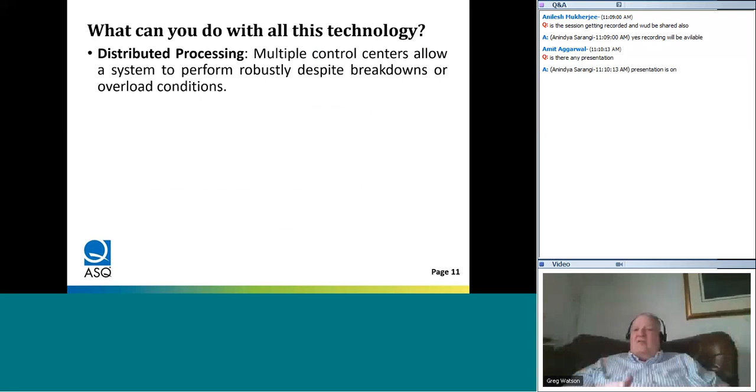And as we start looking at it, well, we can have distributed processing. So we can have multiple control centers that allow us to operate robustly despite breakdowns or overloads. Typically, what would happen in many factories is a single system where we have central processing. But now things can be done in a distributed way.

We also see we can have automated detection, where we have sensors remotely capturing minute changes in the system, and we can now start seeing, okay, let's react in a more real-time environment to what's happening in the system. We can have remote diagnostics.

One of the companies here in Finland that's not very far from here is Kone. They make elevators. And for about 15 years, they have had systems monitoring elevator performance through the internet. And they can actually make remote changes to fine-tune the way those elevators operate as they see changes in the systems that tell them something needs to be done, or even get a cue that says, come and send a service operator. It's more than we can handle by computer.

Adaptive learning. As we start looking at this data over time, we can learn from the patterns of change that we see. And we can use this as one way to understand what needs to be done, or is there a problem coming? So also close by is a refining company, Neste Fuels, and they make renewable fuel. So they'll make fuel out of fish fat and animal fat and all the bad things that we tend to throw away, and they turn that into fuel now.

And so they can actually learn from the patterns of the way the refinery operates. Is it getting time where we need to change catalyst, or we have to change the temperature, or recycle the materials in the converter systems?

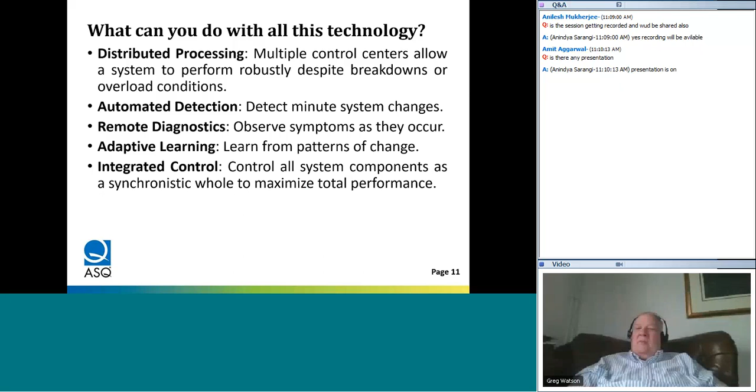And then we can also have predictive analytics. And this is where we reduce future risk or improve the real-time control of the system, because we can predict exactly what's going to happen with some degree of probability. And this is exactly what Deming was talking about when he talked about profound knowledge, that we predict the future with some degree of probability.

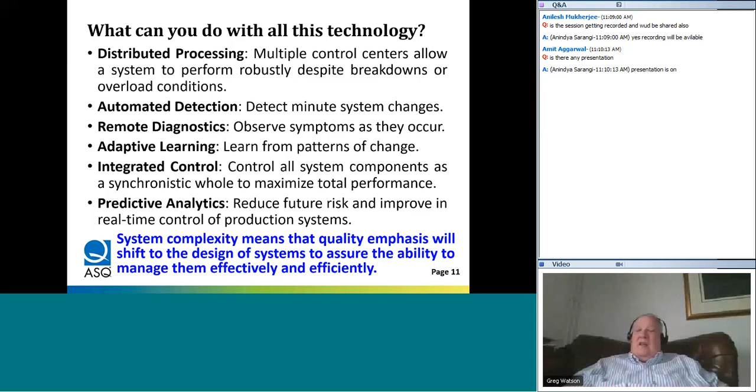So system complexity, though, means that the quality emphasis will shift away from managing the system to the design of the system. In other words, we will have to anticipate all of those things that can go wrong to assure that the system can manage itself efficiently and effectively. And so that means there's going to be a shift in what we do, because we have to get to the front end of this. If you're going to put that system in place and let it run, that means that we have to make sure the system understands what it should do in all the different circumstances.

So we also see there's an aging of the traditional quality technologies. It's not just me getting older. The stuff we do is getting older. And so we start seeing there's been an analog to digital techno shift. And so many of the quality tools we have were created in what I think of as the analog age. And they do the manual manipulations and hand calculations.

If you think about it, people like Kaoru Ishikawa, who we venerate in the quality community, he never used a personal computer. And so we think about the tools that they made. They were made to be operated with pencil and paper. They're very good in terms of human activities and things we want to do in a manual mode, but they're not necessarily good for the digital age. And so we start seeing these methods don't comprehend the abilities to capture and analyze data via computer systems.

In just one example, in an ASQ article I wrote about a year ago, it was about fishbone diagrams. And fishbone diagrams were a good way to decompose a problem in a manual system.

But today we can use something like mind maps, and we can start taking a look and more aggressively understand what's happening. And even on some of those mind mapping software, we can connect it to the data and let the data operate. And we can take that another step further if we start looking at automating how you do those connectivities within the systems. And those will be techniques that we will transition to as we get into this design age.

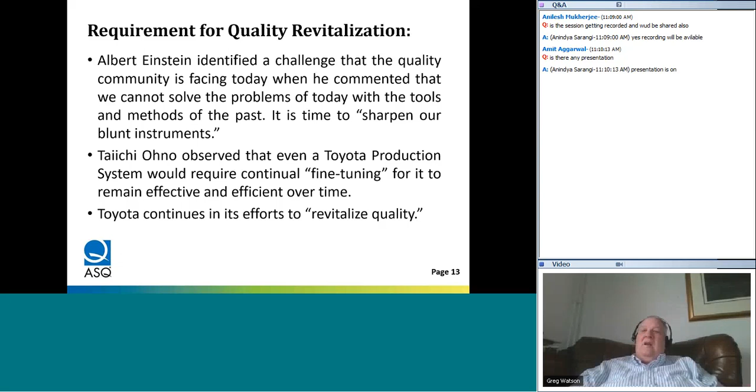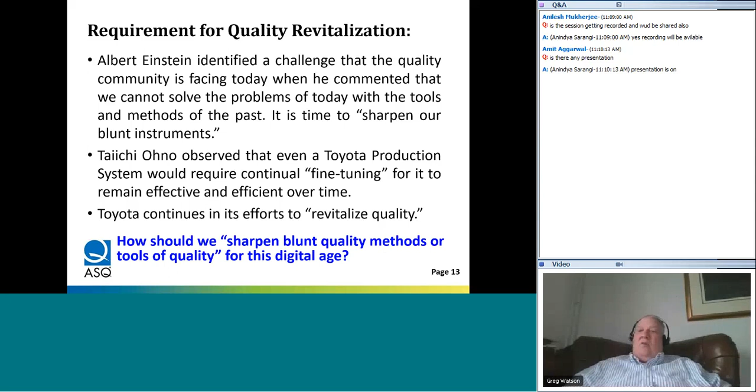And so how should we sharpen our blunt quality methods or tools of quality for the digital age? If we don't do it as people who care about quality, who's going to do it? And so this is going to be our challenge. How do we redefine quality for that digital age?

Well, first, this problem is deeper and more comprehensive than mere fine-tuning or reimagination can perform. We start seeing that this technology shift is similar to a shift from an internal combustion engine to an electric motor. You just don't plug and play and say, okay, copy, cut, and paste, move motor out, put motor in. We have whole system changes. And as a result of having that motor, we ask, how do we charge this?

Do we charge it off of braking systems where we can start finding some friction and use that as a way of adding power back into the system as we dissipate it out to run that electric motor? So we have to think about the whole system, how we'll re-engineer everything.

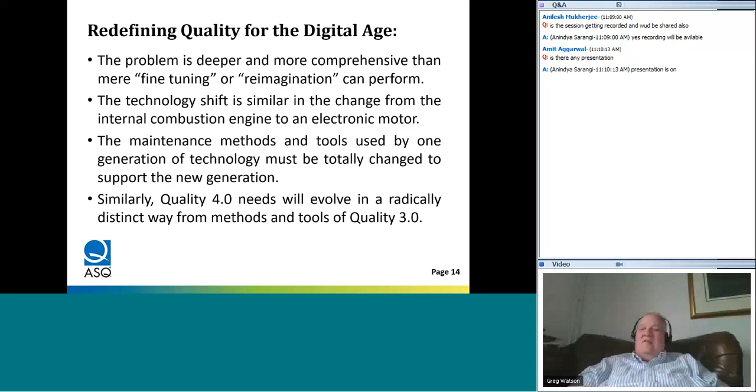And so the maintenance methods and tools used by one generation of technology must be totally changed to support the new generation. And so similarly, Quality 4.0 needs to evolve in a radically distinct way from the methods and tools of Quality 3.0. And so Quality 4.0 will have this total rethinking.

How does a quality system operate? What are the methods and tools of quality needed to support it? And what's your role? Will there even be an ISO 9000? Maybe we have to radically reinvent everything we're doing in terms of quality to meet this stage where the operator is no longer the source of variation, it's the designer of the system.

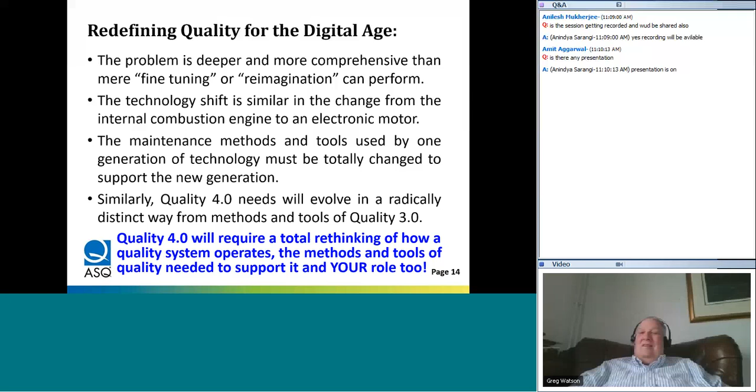So that brings us this question then, the second question. How do we learn to do smarter data inquiry? And this is the challenge.

I've grown up, fortunately for myself, I guess, in a digital age. When I was in high school, we had our first computer. It was an IBM 360. So I was 16 years old and I learned how to program BASIC. I'm 72 now, and I forgot how to program BASIC. But everything now is so much more simple because we've got higher order languages and all these other things happening.

So how do we get this smarter data? Well, Deming talked in a 1975 article in the American Statistician about the two types of data. He said there's enumerative data and analytic data. And when we look at this, he treated them as mutually exclusive. And he says that enumerative data is a collection of everything. That's when you're looking at the total distribution. There's no time component in that data.

And what you get out of that enumerative data is an analysis of risk. It's basically what you see on a process capability diagram. You see everything, and then you see the upper and the lower customer expectations. And then the other type of data is analytic. And analytic data is where we see the time history happening. And in that time history, what we're seeing is like in a control chart. And we start seeing how everything is moving over time.

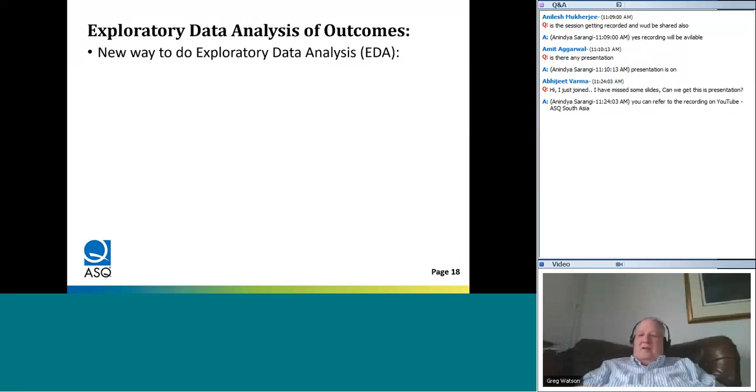I want to understand what are the physical and logical relationships in this historical stream of data. I can use six tools in sequence to build that learning.

The first is the individuals chart. This gives me the understanding of the sequence of patterns we see in the historical stream of data, and whether those patterns tell us something. Is there a trend? Is there an oscillation? Is there clustering in the data? Is there excessive variation? All of those are things that can be detected out of that system. Yes, computers can do that, but so can the human eyeball. We do that with an I chart, an individuals chart.

Now, one of the problems we have is all of the rules we have for those I charts are wrong. We can easily turn them on in the computer system, but they're wrong. Why? Because some data is maximizing data, like productivity—we want more, so the best performance is skewed towards the top of the scale. Some is minimizing, like defects or safety incidents, which means it will be skewed towards the bottom of the scale. So if the detection rules are based on normality, they won't give us the right set of rules, and we can get confused. We have to change that.

Another thing we can do is take a look at that same data in a different perspective, in probability space. We can view it as a cumulative distribution or probability plot, showing the likelihood of occurrence of each magnitude in the data distribution. On a probability plot, if I see a vertical line, it says all the data is at that probability level. As it starts going off, it says a new function is happening—something different than before. The number of distinct curves I can observe visually on a probability plot indicates how many different functions are actually affecting the data stream I'm observing.

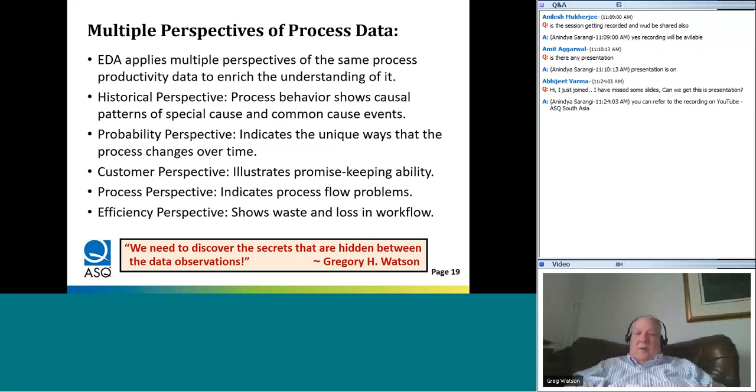So what we need to do is use this to discover the hidden secrets, and these secrets are hidden between the data observations. If we only do one-factor-at-a-time analysis, we won't be able to really understand all of those things. So we have to have an approach I call collaborative analytics.

Collaborative analytics has three distinct dimensions to it. First, it's people working together in a network system.

Just as I'm now coming into Calcutta or Delhi or Hyderabad, I'm coming into maybe Goa. I understand it's a little better place to go, the vacation place.

So we're now living in a world that's totally distributed, and we can have people all over the world working on the same problem. I remember years ago, I was writing a book in 1994, and I had the very first instance of a Price Waterhouse consulting group having 24 hours to write a proposal. They gave it to three of their work centers, separated by eight hours around the world, and they just passed the proposal electronically through and had it done in 24 hours. I said, hey, that's cool. And now we think, yeah, so what? So we start living in a world differently.

Second, networks can operate together. Our computers can talk to each other, and we can collaborate in this digital world as well. Third, we can have a group of networked experts working on data collection and processing to create what I call a hive mind—this is the hive, whether it's ants or bees, working together for a centralized purpose.

And now there's a group on the internet called digital doctors. What happens is, if you're living somewhere that doesn't have an expert, you can dial into digital doctors and have four or five experts help you on your diagnostics for a case. So the components of this approach are already factual states of existence, and soon they're going to merge together.

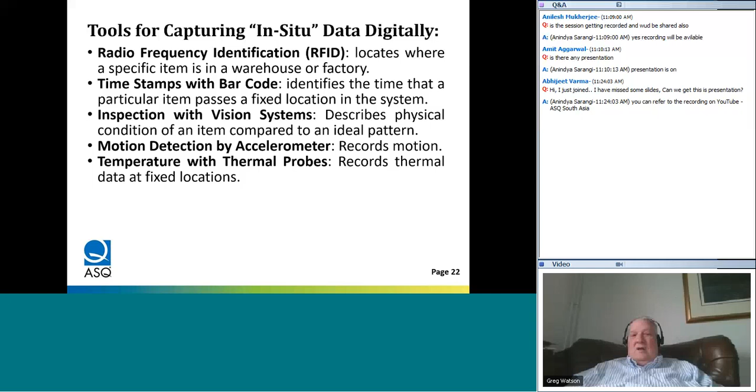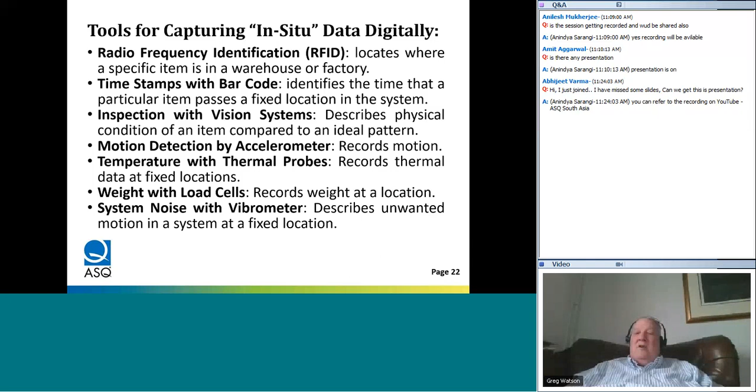We can have motion detection by accelerometer, recording how much motion is happening in a system. We can have temperature checks with thermal probes, saying here is the temperature at a particular fixed location in the process. We can have weight with load cells, recording weight at a particular location, or system noise with a vibrometer, saying there's unwanted vibrations in this system at a particular location.

So all of those are saying, what we have to find is where is the checkpoint for that particular measure we'd like to have in our system. Just as we have checkpoints in a manual system, we can also have checkpoints in digital systems. Remember, in a manual system, a checkpoint is where you use the measure to say how are we progressing — it's a monitoring process.

We can also have a control point, which is a checkpoint where you monitor, but you can also have a feedback loop to change the process. And when we have the feedback loop changing the process, that's when we have the automated control system. So just by analyzing our factories in a different way, looking for checkpoints and control points, and asking ourselves what is the sensor we would need to use to make that control happen.

And then buying the cheap ones from maybe Alibaba, we start finding out. I have one client with rubber factories all over the world, and he's trying to figure out a problem with vulcanization. It used to be you'd have very expensive platinum thermal probes. He bought a dozen digital sensors from Alibaba, about €1 each, threw them in the mix, and had them report. He got really good information. For less than 20 euros — I don't know what that is in rupees, but I'm sure you guys can do it in your head — it's not much money, but he got the same result as he would have gotten from a platinum thermal probe years gone by. So what can we do cheaply?

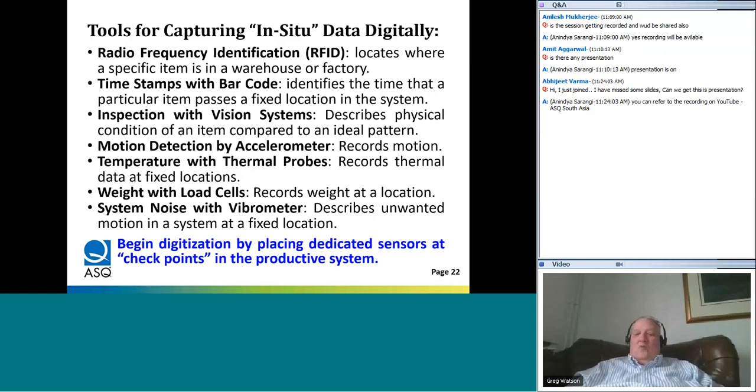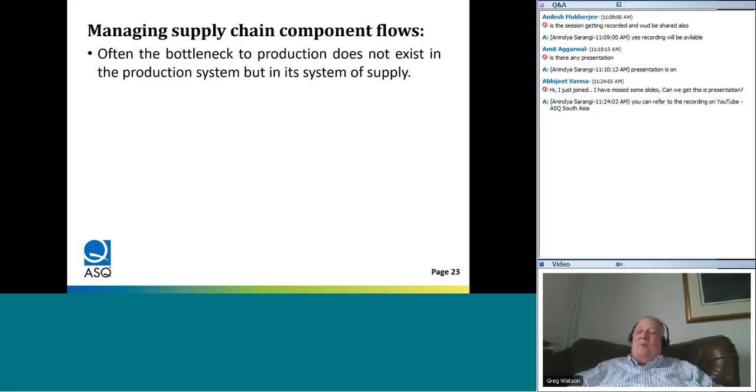We can also manage this in supply chain flows. Often the bottleneck in production isn't in the production system — it's in getting the parts to that system in the supply chain. So managing flow of supply and assuring quality as agreed to are two very important applications of digital technologies.

So we have barcode labeling, system scanning at critical waypoints, linking barcode identifiers to shipment and quality information. That gives us traceability of components from the source to the destination. This was the very first application we did at Hewlett-Packard, because the barcode scanners and printers were very cheap — as a matter of fact, we made them ourselves. So what we can do is learn basically where we're going, taking a step towards this idea of central control for something very important: the motion of all those parts coming to the point where we have the consolidation in production.

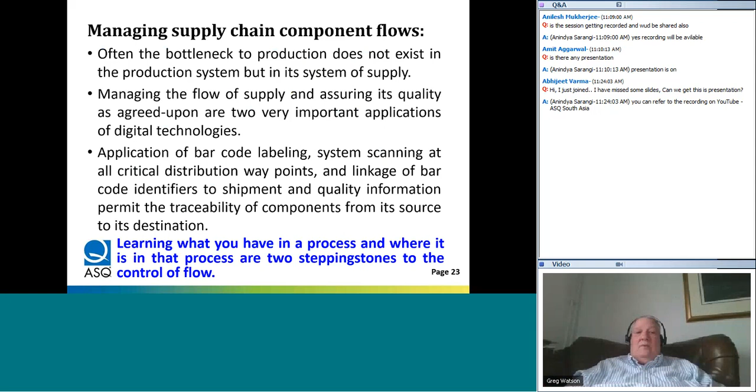We can also understand production throughput. And here we can learn how the process flows and locations where the bottlenecks are. And these are important ingredients to assure lean production systems. But we can also do this in a frugal manner.

So barcode labels must be placed on the actual entity that's flowing through production. Maybe it's either the part we're making in a factory, or it's going to be placed on the tray in which we're making it. And as we go through this place, we'll then see the scanners are placed at the checkpoints.

And if we have those wirelessly enabled or capable, then we can have a factory-wide system that says, here is the central historian that's telling us how we're actually moving things through the factory. And we can use R script. So R is a universal programming language for statisticians. So we don't have to use Minitab or SAS or something like this.

And we can use this R script for ANOVA coupled with Microsoft Power BI. And we can then get a tracking system put in place. And again, it's relatively cheap. You're not talking about having lots and lots of programmers. You're talking about things that here in Finland, we have the students coming out of graduate school or undergraduate school actually writing that code because they learn how to do it. So we have them making up those systems.

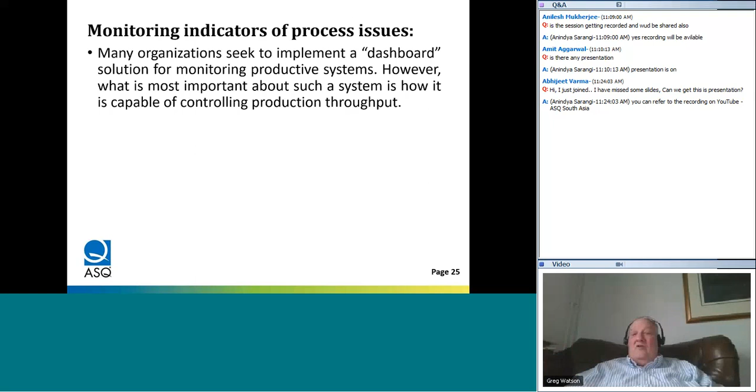And one of the things that I know happens in consulting firms is they want to come in and program your dashboard for you. And I found most of those are worthless. And they say, we'll program for you your balanced scorecard. Half the measures in most balanced scorecards are worthless anyhow. They're reporting about what happened in the past. They don't give you predictive information about the future. So we'd like to understand, how can we control production differently?

So the quality of a production dashboard is not about balance in the measures. It's not about the completeness of the set of measures. It's, does this measure have a capacity to predict quantity and quality of the productive system? If I take a look in the shop floor in a well-run Toyota system, there's only two indicators they're really using to manage that system.

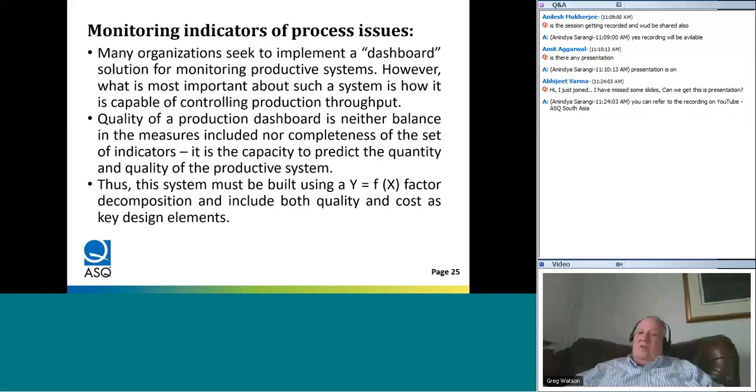One is the amount of productivity completed, that's the level, and then the rate of change relative to the takt time. So it's the cycle time differencing. And so it's not a complex system that we can use to manage a production process. And if we build this using Y as a function of X, as we learn in Six Sigma, and we do this decomposition, we can include both quality and cost as key design elements.

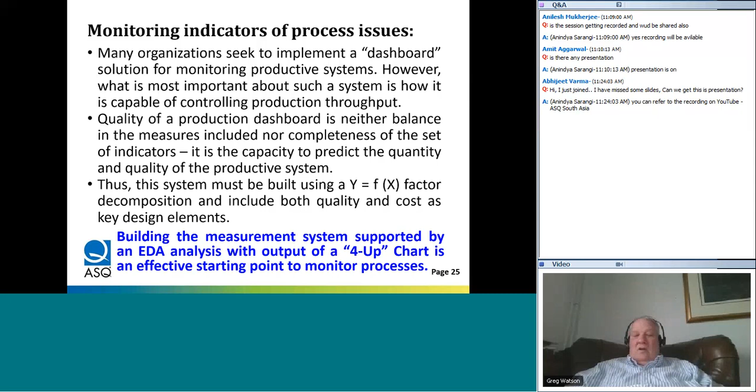And so one way we can do this is an old chart Motorola introduced at the very beginning of its Six Sigma journey, and it's called a 4-up chart. And what we see there is I have 4 panels. So these are Minitab panels. The upper left panel is the individuals chart, and there I actually have smaller is better. This is talking about backlog in production in the real world case. This is a real world case, by the way.

And I'm moving from 100 days to I want less than 20 days, and I get it into a state of control. The second chart is actually all of the data because I can't quite show exactly what this company did, but you can see that the very wide black line is the achieved capability, and the red line is the Cp that was designed in the process. And we see that the achieved capability is nowhere close to the design capability.

And when those two merge and we shift them within the upper-lower control band, then we have a system that's locked into a state of control. And I can just interpret that visually. The Pareto chart here tells me which of the rational subgroups is contributing to the loss. So I can then take a look at those.

And then the ANOVA chart says, here's the takt time. And then that red line, that's the design time. And clearly, smaller is better. My takt time is way off my design time. And as a matter of fact, all those little asterisks up there indicate those are the failure mechanisms in production state. So in that one 4-up chart, I can actually understand what's happening for that factory production system. And I can use this as a way of understanding how well we're doing.

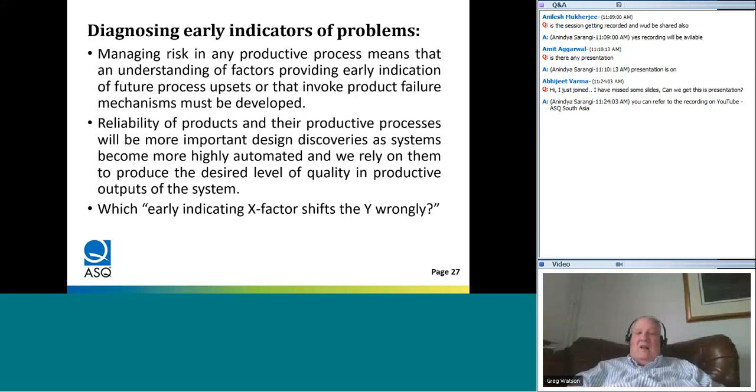And so we're going to start seeing process analysis importance is going to shift to an imperative in design of productive systems. We have to understand failure states better. And that means when we're designing our systems, we have to design them, force them to fail, and then learn from failure. As many people have said over the time, we learn so much more from failure than if things are operating. If things operate right, all we did was we had a confirmation that we understood how it works. We didn't learn something new. If it fails, I have a golden opportunity to find out something different that I hadn't expected before.

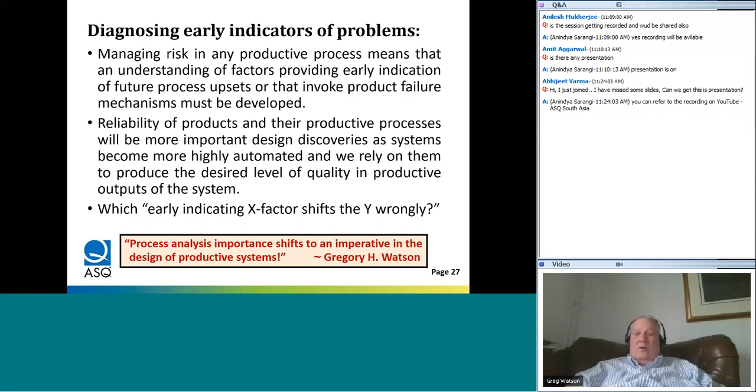So, in conclusion, I don't know what my timing is, but Anindya hasn't yelled at me yet, so I guess I'm not bad. So I want to summarize just a couple of key points.

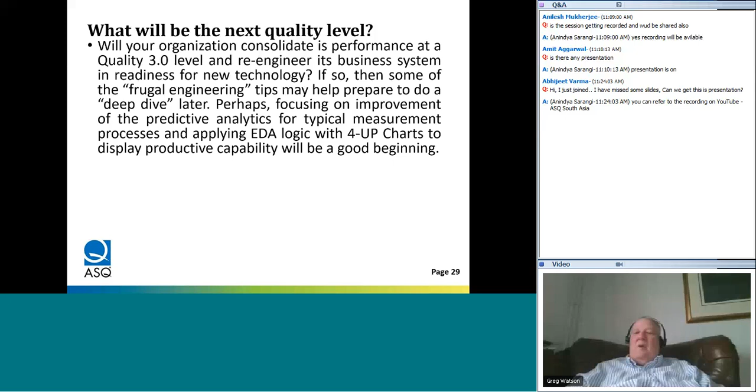So what will be the next quality level? So do you have to move to quality 4.0? No. Let's just say you're quality 3.0. That's what we call good quality today. And we have to re-engineer the business. So maybe you want to move some frugal engineering tips and save the deep dive for later. So take a look at what are some things we could do. Maybe we could apply this EDA logic. Maybe we could use some 4-up charts and get some more profound knowledge before we invest heavily in the system.

Maybe we can ease into and create a quality 3.5, if you will. And that is where we move halfway, and it's a hybrid approach. The quality professionals are still actively involved and can guide the IT professionals into how do we put this system together. And that way we can ensure the implementation is flawless.

One of the big problems I see is if people give all of this and say it's technology, quality doesn't belong, let the IT people do it. We'll obsolete the quality people. Well, that doesn't work because the IT people are not process people. They do not understand the process. And this is what collaborative analytics does. It's going to require relationship building, cooperation in cross-functional partnerships. Yes, our jobs will change, but so will the IT people's jobs, by the way.

And as we start thinking about this, then we have to ask the second question. How will you be ready for it? So to make that transition in a company, the quality professionals are needed. But we also have to then say, what will we do when the transition's done? Do we obsolete ourselves so we don't have a job? Or do we do something different?

I think one of the more interesting insights I've had into Toyota is that we know in Six Sigma that when we start making processes more efficiently, we always can come up with headcount savings. And so we save people. So what do we do with those people? In Toyota, they don't fire those people. They take the best people out of the process. And so that then creates the sense of purpose. People say, I have something to do. So the excellent people then become the water beetles, the supervisors, the people who help everybody.

They're the trainers, they're the troubleshooters. And so they go back into the system to still work on that. And they become supervisors in training. So if we take a look at ourselves, we have to figure out what is going to be our path

forward. So how well are we doing in terms of our knowledge of systems engineering, design thinking, time series analysis, predictive analytics, SQL data query languages to go in and find out what's actually happening in the data. R is a statistical programming language.

I'm getting to the point where I hate Minitab because somebody made a decision about how to use it. I don't want to use it that way. The Minitab assistant, I forbid anybody from touching it because it is programmed to do things in a classical way. I need people to think. And so R makes you think. Microsoft Power BI, it's an easy way to start getting into dashboards and control systems and reporting systems.